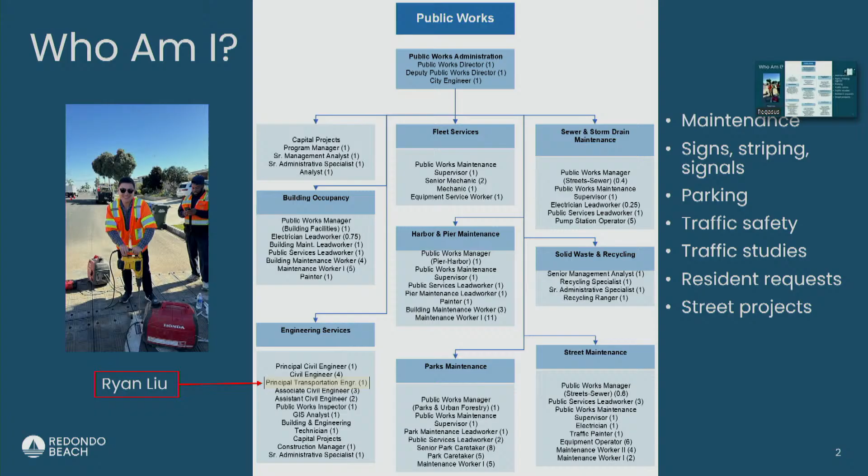As the city traffic engineer, I'm responsible for the maintenance of our streets, signs, striping, and traffic signals, parking, traffic safety, and traffic studies. When there's new projects, I make sure a traffic study is done if required, or that the location of their driveway meets current standards. We respond to all resident requests, so any member of the public can reach out to us with questions and we'll have answers for them. And I work on street projects as well. Next slide, please.

The general process for requests is, we as city staff receive a request from the public or from an elected official or from our Public Works, Safety and Sustainability Commission. Sometimes we get requests from other staff and other departments. So once we get that request, we'll review based on certain policies that the City Council has implemented, and state and federal laws. We'll provide next steps and any recommendations.

Sometimes some resident requests can be handled very quickly within our department. Sometimes it requires approvals or at least looping in the council member. So sometimes we'll go to our Public Works Commission, we'll bring a recommendation and analysis, findings, and have them weigh in on the proposed changes, whether it be speed bumps, stop signs, bike lanes, and then ultimately, generally, the City Council will consider and give us the approval or denial of the recommendation.

And from there, we go forward to finding money to build these things, or installing a stop sign. That's pretty easy. We will proceed with that approval after that. So it goes through the request, analysis, and approval process. That's how things get built in this city.

Next slide, please. So just some terminology on bicycle facilities. In the state of California, we define bicycle facilities as class 1, 2, 3, and 4. So starting from the top right, a class 1 shared use or bicycle pedestrian path, that's where it's a pretty wide stretch of street that's separated from the main road, where cyclists get their own space and people who are walking get their own space. The beach bike path is a good example of that, where we have 2 lanes just for the cyclists and then a space to the side for people to walk.

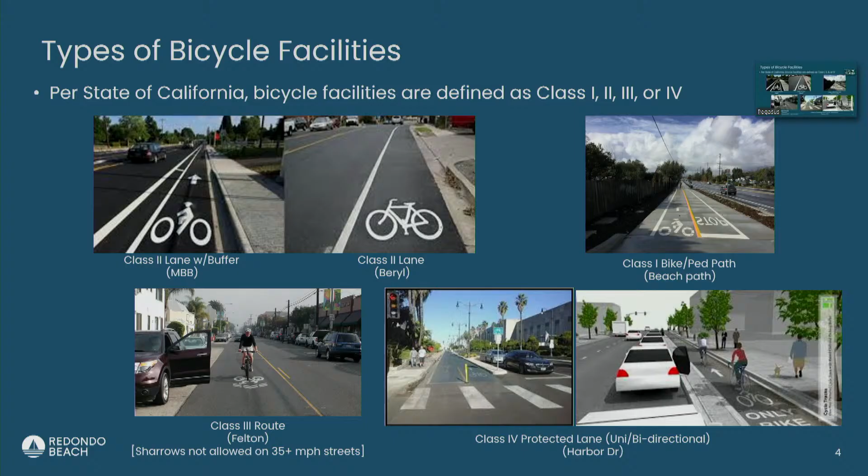Next slide. So generally, this is the safety comparison between the different classes of bicycle facilities. If you're on a major street, that figure on the bottom, a class 3 bicycle route might not be appropriate or it's not considered as safe as a Class 2 bike lane, a Class 4 protected bike lane, or a Class 1 off-street path. Generally, as you go from 3 to 4 to 1, there's more safety, more comfort, and you can imagine, most of the public feels more safe on the beach bike path than on a bicycle lane on a busy street.

Different classes are appropriate for different streets. If we're on a small residential street, you might not need to have a dedicated bicycle lane because the drivers are not going that fast.

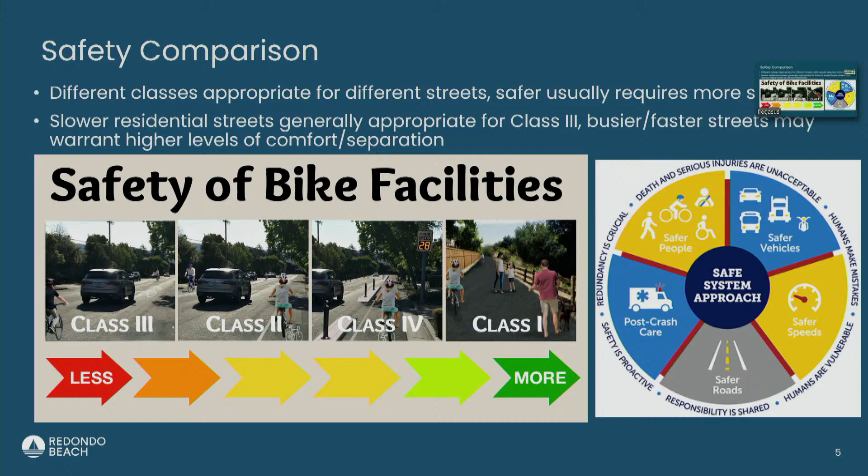One of the approaches that we take is the safe system approach. This is a newer type of guidance from the federal government that talks about how we design streets to be safer, not just safer road design, but also making sure that our vehicles have active safety features. There's good response times when collisions do happen. So there's a whole all-encompassing approach that a lot of agencies are taking nowadays to improve roadway safety.

Next slide, please. So why bicycle lanes? This is a list of all the benefits of bicycle lanes. These bicycle lanes improve safety for all roadway users, not just cyclists, but also drivers who, when you provide dedicated space for cyclists, don't have to worry about mixing with cyclists. It achieves all of our sustainability goals, lowering emissions, reduces congestion and parking demand.

So I'm sure some of you take that bike trip down to RUHS. It's only a one-way trip to go to school versus a parent having to drive to school and then back, so it saves a trip. Bicycle lanes are a more efficient use of public space. You can move more people in that amount of space than in a vehicle because a bicycle is just smaller. And so that also results in lower long-term roadway costs. Bicycles are a lot lighter than cars, so the impact that today's large SUVs have on our pavement results in the pavement wearing away faster, whereas bicycles have much lower impact on our roadways.

We all know that cycling is great for health, mental, physical, and social, increases mobility and freedom, especially for people who don't drive, so people who aren't yet old enough to drive or don't feel comfortable driving, or perhaps aging out of driving, people who are getting a little older and not so comfortable behind the wheel. Bicycles are a great way to maintain or increase that mobility and freedom.

And lastly, bicycle lanes are usually pretty good for businesses. I've seen a lot of students after school talk about where do you want to go eat after school, whether it's Taco Bell, Chick-fil-A, and they will take their bikes there. And sometimes that's not really possible when you're driven to school and you don't have that bike available to you. You don't get to go with your friends to that restaurant and then go home. That bicycle provides a lot of freedom.

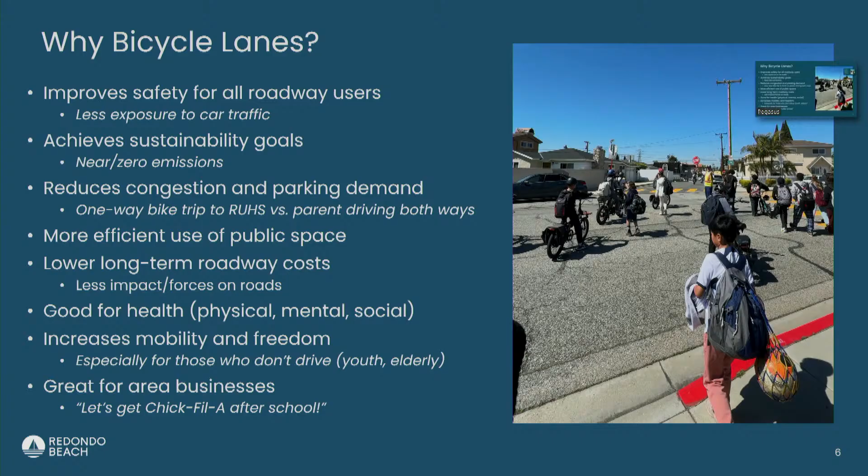Next slide, please. So, bicycle lanes are great, but why aren't they everywhere? Why don't we put them everywhere if they're so great? We have a lot of constraints in our roadway space. Redondo Beach is a pretty old city. We have limited widths on our streets. We have lots of driveways, lots of competing needs and engineering challenges. So oftentimes what it takes to put a bicycle lane on a major street may require removing car parking or lanes for automobile traffic. Sometimes that can result in local opposition. So that's the balance that we try to strike.

And oftentimes these projects, as they're going through the approval process, we do have to make difficult decisions on, do we want to keep street parking for residents, or do we want to provide a safer place for cyclists to bike in? So projects like these can be costly if we have to widen the road, move curb and gutter. Nobody wants to lose their home for a roadway widening, but sometimes that's what's required to install more street infrastructure. It also requires moving ramps, changing signals if we have to widen the road. So sometimes bicycle lanes can be very costly to build. And so there's a lot of study that goes into it.

And also, not every street requires dedicated bicycle lanes. A lot of our streets in the northern neighborhoods, like Marshall Field, Ringe, Felton, Slauson, they're pretty tiny streets with stop signs on almost every block. Streets like that, most people are going below 25 miles per hour, almost at the speed of a bike. So streets like those generally do not require bicycle lanes.

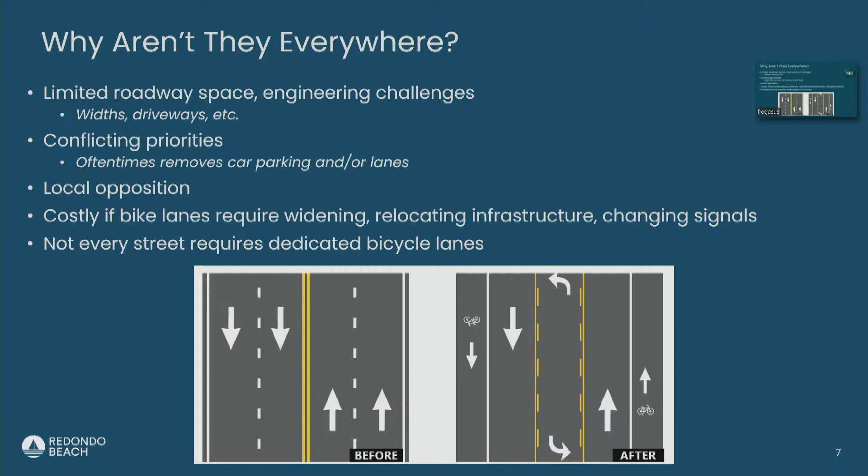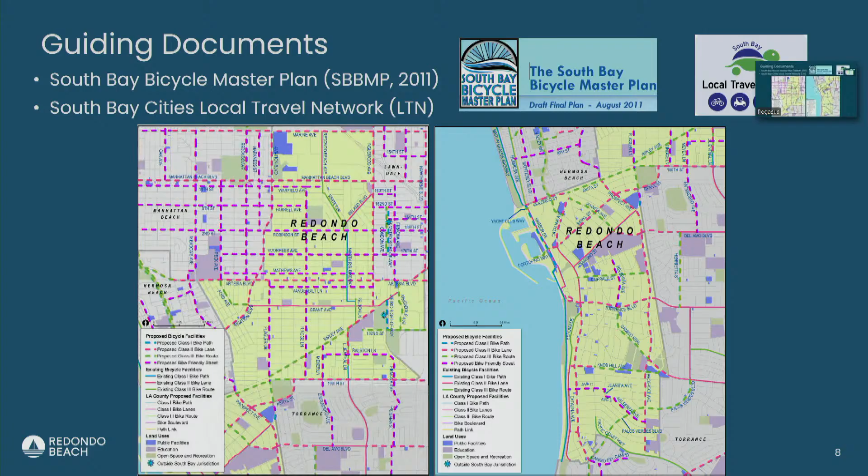And so these two maps show the northern and southern halves of the city of our bike plan. Next slide. The other guiding document is a bit of a newer concept to us. It's called the South Bay Cities Local Travel Network. So this isn't specifically bicycle lanes, but this is a routing and wayfinding system using current streets that help all types of mobility devices. So whether it's golf carts, which we do see sometimes around here, e-bikes, scooters, skateboards.

This is a network of routes generally on lower speed residential streets that you can get all around Redondo using these streets. And I'm sure a lot of you, as you bike around town, these are probably the streets you use because you know that when you're crossing a major street, you're gonna get a traffic signal or a stop sign. So like Rindge going north and south, Ripley, Flagler, Beryl, Esplanade, these are the routes that we've designated,

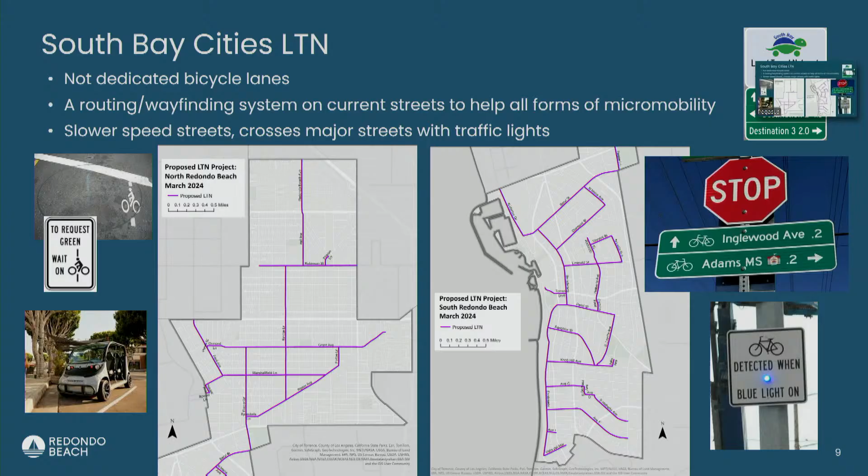and we're gonna put up wayfinding signs to help cyclists to various destinations, the distances to those destinations, so that way they don't get stuck and find themselves having to turn onto like PCH or 190th Street. And these are generally flatter routes as well. So this is a system that we'll be implementing with wayfinding signs. And once we install that wayfinding sign network, we'll be trying to improve the detection at the signals so that cyclists can be recognized at those signals and the signals will turn just like how they do for cars.

Next slide. So this is the current progress that we've made on our bike plan. So since 2011, that bike plan identified about 26 miles of dedicated bike lanes to be built. At this time, we've built 44% of that network. So that's pretty good progress compared to other cities. We have a further 8% of this network in design and 2% in planning. So we'll hopefully get that 44% up another 10%.

We also have an additional 12% of the network that was considered at one time, I think this was back in 2018, to add bicycle lanes to Prospect. But I think at that time, the community was not in support of that because it would require taking some parking or lanes away. So that is a portion of the bike network that we kind of shelved at this time. But we're working on other streets in the city.

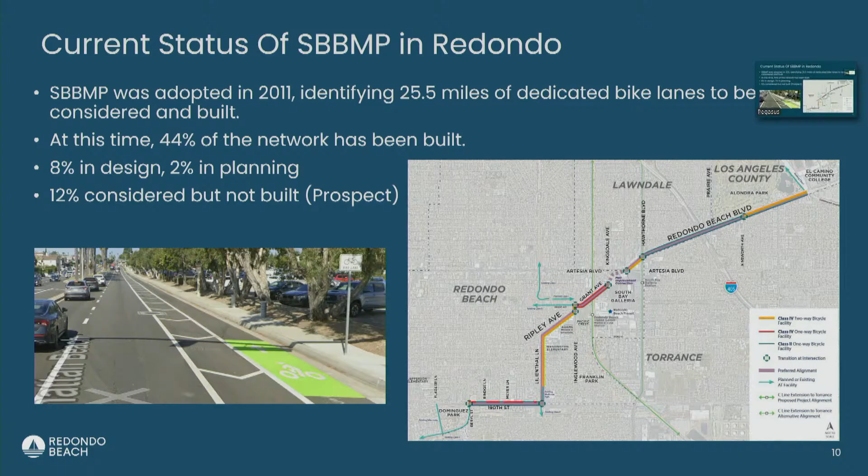So the picture to the left shows Manhattan Beach Boulevard with the new bike lanes that we created. That's the buffered bike lane. And the map on the right is the Metro Active Transportation corridor that we're starting design right now. It's a bike corridor that goes on 190th Street, up Lilienthal, Ripley, and then goes northeast towards Artesia and Redondo Beach Boulevard all the way to El Camino College. So what we're trying to provide is a bike corridor that links the middle and northern half of the city to the South Bay Galleria, the future K-Line station, and the El Camino College as well.

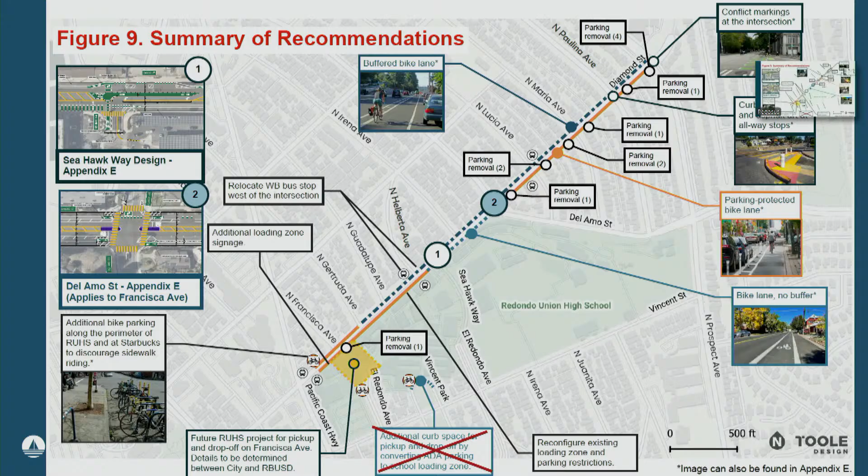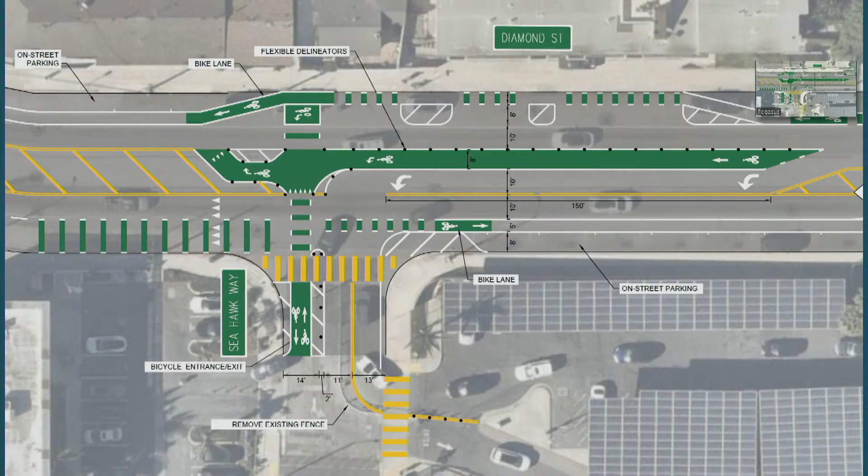So one of the downsides of a class 2 bike lane is when you're riding in that bike lane, you're next to parked cars, you're not sure if someone's gonna open their door, and that's a crash that many people can't avoid. So by adding this buffer next to the car doors, if a car door opens, it opens in a path where a cyclist won't be riding. And so increasing that distance will help the safety and slow down vehicle traffic as well.

Yeah, I just want to thank you for your presentation and the work you've been doing. We really appreciate it. I have a couple questions, but just before I start, does anyone else have any questions they want to get on?

Yeah, go ahead. Yeah, so I remember earlier in your presentation you brought up the bike lane on the Strand. What did you classify the Strand as, like a class 1? Which classification was that? Class 1. So a class 1 is a shared use bicycle and pedestrian path that is totally separate from the street. So the Strand would be considered that type of path, not on Harbor Drive, but the one that's along the sand, because it's totally separate from the street. Got it. Thank you.

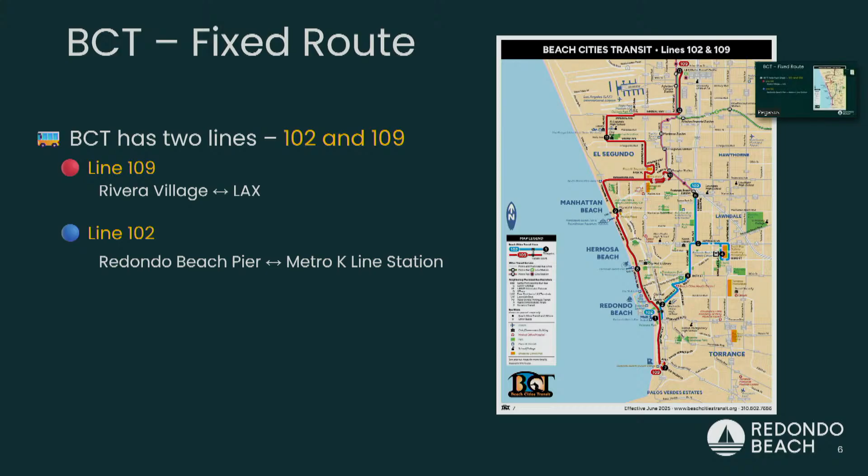It really helps alleviate overcrowding on the buses. Next slide. So how much does it cost to ride? General fare is $1, 50 cents for our seniors. If you're transferring from our 102 to our 109, it's free. And if you're going interagency, it's 25 cents. We accept cash, TAP card, mobile TAP cards.

And then something I want to call out is our Beach Cities Pass. Some students might be familiar with them. It's available, it's $20, but there's a subsidy for Redondo Beach student residents and Lawndale residents, lowering it to $8 a month. And you could use it anytime on the weekends and weekdays, and you could use it on both the 102 and 109 and getting to those cool cities.

Go ahead, next slide. So I really wanted to share with you guys, transit is more than just buses. We share live data on our buses. How many of you have checked Google Maps, the Transit app, Apple Maps to see where your bus has come from? Cool. Have you ever wondered where that data comes from? So I'll go ahead and explain a little bit more on that. Let's stay on that, yeah.